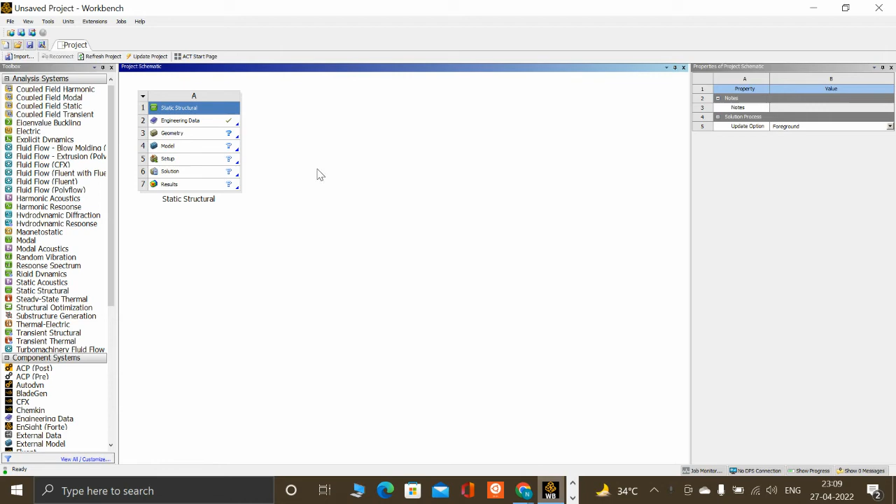So here we have to firstly input the engineering data of the materials that we are going to use. So we are basically going to use annealed copper and we are going to use die steel. So for annealed copper we choose isotropic elasticity and as well as bilinear isotropic hardening.

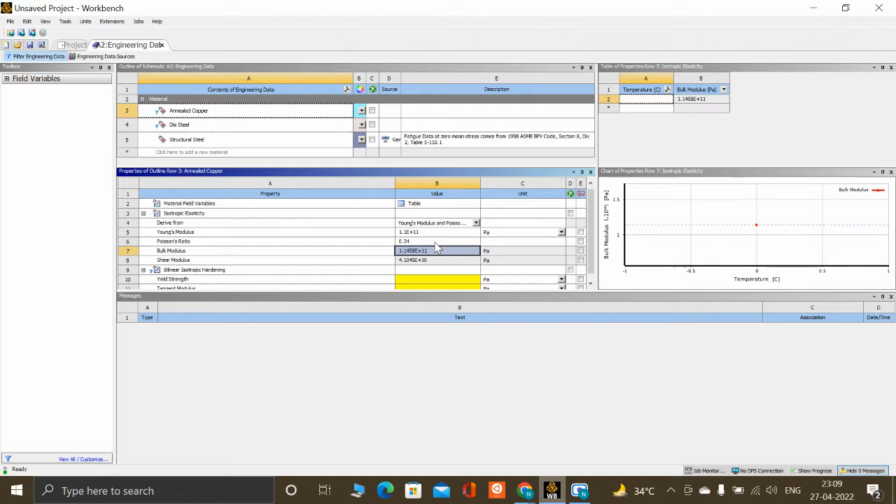So Young's modulus of copper, if we look at it from the slides, it is 110 GPa and Poisson's ratio is 0.34. So Young's modulus is 110 GPa and it is 0.34. The yield strength is given as 33 megapascal and tangent modulus is 167 megapascal.

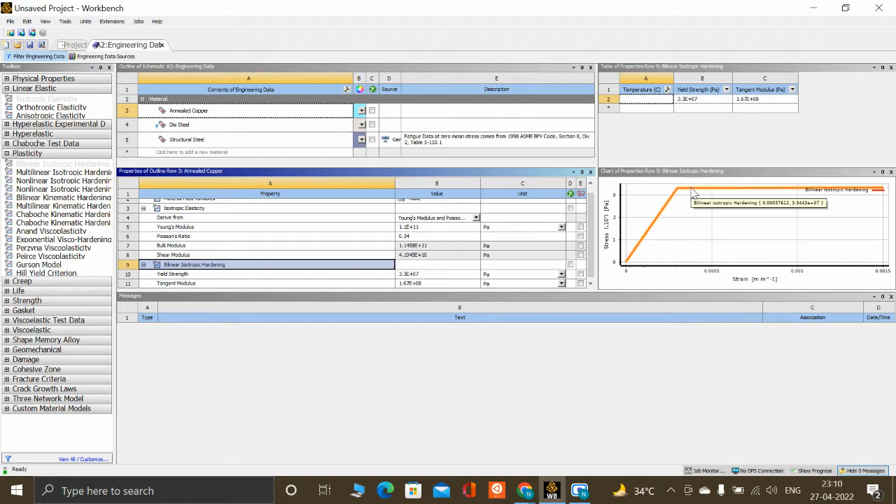So we can see this is the bilinear isotropic hardening. So this is the elastic part and this is the plastic part. As we can clearly see, the slope of the plastic part is lesser than the slope of the elastic part because Young's modulus is in gigapascal and the tangent modulus is in megapascal. So that is quite obvious.

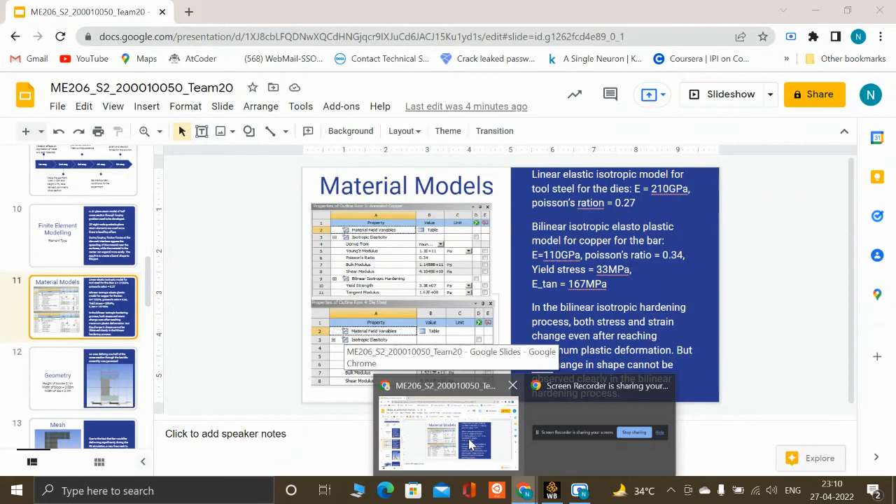We now define for die steel. So die steel will majorly deform only in its elastic region. So we choose only isotropic elasticity, and we again set the Young's modulus to be 210 GPa and Poisson's ratio to be 0.27. Okay, that's fine. So the materials have been defined. So let us save it.

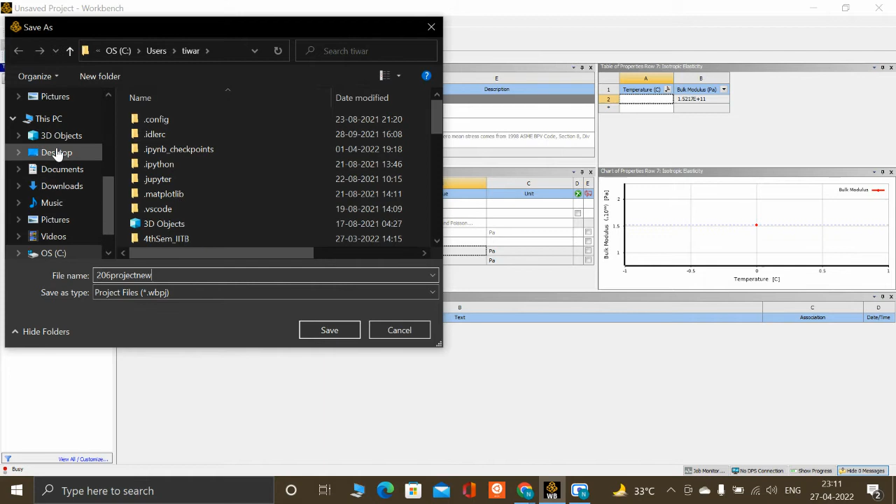Okay, the project has been saved. We now return to project. We now go to geometry to define the geometry of the material. Firstly, we choose the analysis type to be 2D. Then we right click and we go to new DesignModeler geometry. It's taking time.

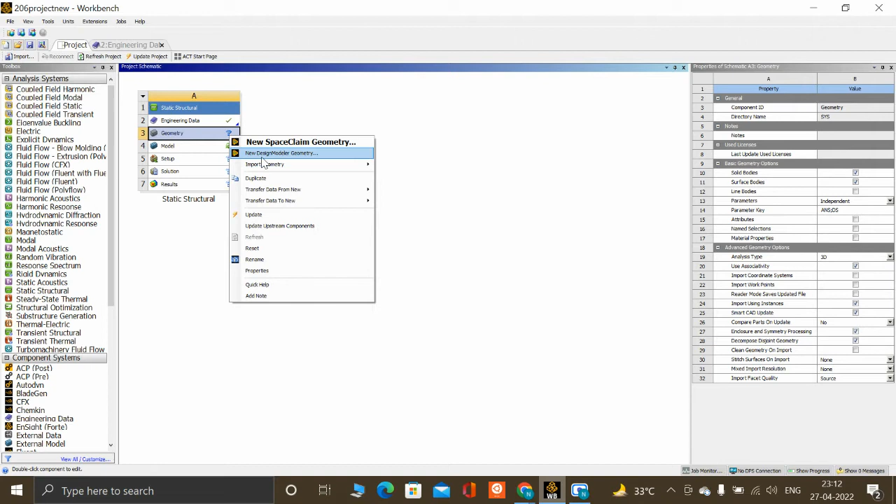We click on new DesignModeler geometry. It takes a little time. Okay, it has opened. So we choose XY plane and so we are now looking at XY plane right now. So we have to draw our geometry here.

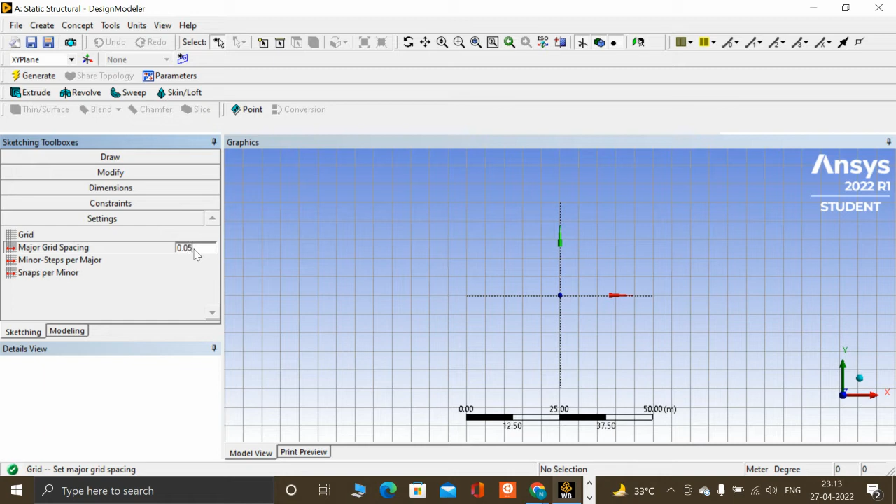So we go to sketching and firstly we go to settings to make some grids here. We make 2D grids and we set major grid spacing to be 0.05 meter because the mesh width is 0.1 meter, so it is reasonable to set it like this. So units, you can check it from here. The units are meter and degrees, so it's fine.

So we now go to draw. We choose rectangle because we are assuming it a 2D strain element. So we enlarge it a little so that these grids are visible. So this is the rectangle that we had drawn. So the width is 0.05 meter and the height is 0.1 meter. Each box has a height and width of 0.05 meter.

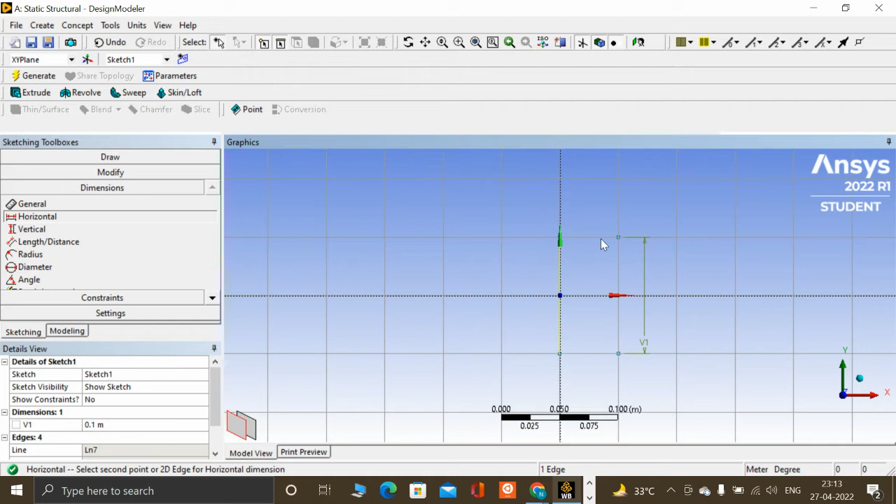We now make some dimensions on it. So let's give a vertical dimension to the given rectangle that has been made, and let's give horizontal dimension as well. Okay, so now we go to modeling. We expand XY plane and we see there is a sketch 1. We now want to create a surface from this sketch. Then we again select sketch 1 and we click on apply.

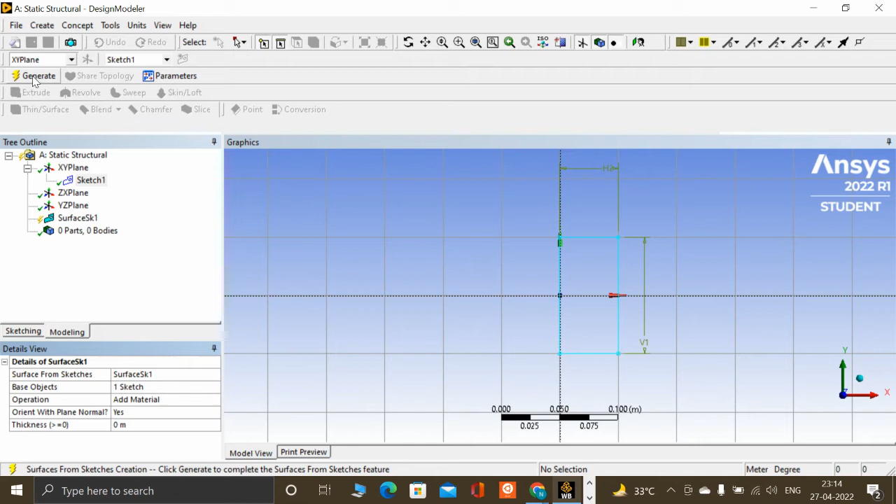So on clicking on generate, a surface is created here, as we can see. Now we also need to make the dies, both the upper die and lower die. So we click on create new sketch. In sketch 2 we again go to sketching. We choose rectangle. So in case of die, the width is 0.1 meter and we can choose height anything. So let's choose it something. The height really does not matter because we are applying force from above the die, and so the height of the die does not matter.

Now coming to the modeling part again. So we have to create the surface again from the sketch. Choose sketch 2, click on apply, but we have to take care that we now change this operation to add frozen, because if it is add material, then ANSYS will think of the two different blocks as the same body and combine them, but we want them to be different and we want frictional effects between them, so we have to change the operation to add frozen here. Then we click on generate to generate the surface.

It has been generated again, and now we need another sketch for the lower die. Similarly, we again go to sketching, we again choose rectangle, and so this is the lower die.

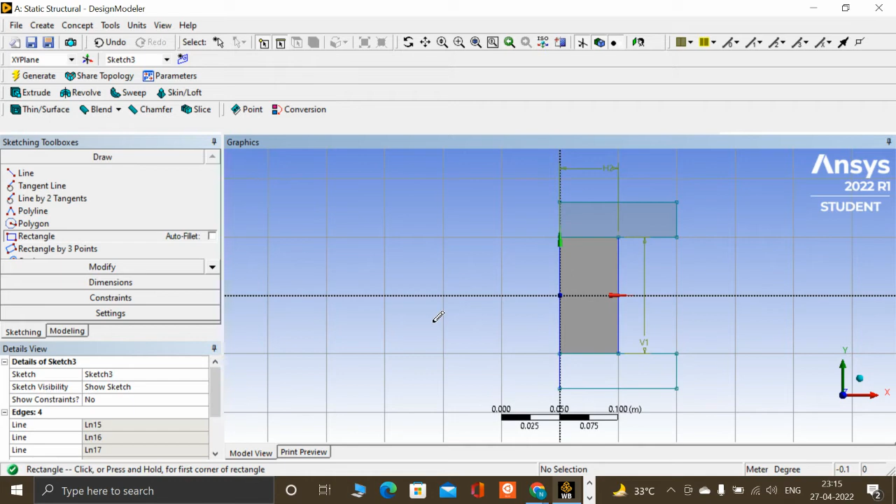Similarly, we again come to modeling, we choose sketch 3, and we again go to create surface from the sketch. So let's select sketch 3 and apply. Again we have to modify the operation to be add frozen, because we don't want it to be clubbed with this copper block. We don't want ANSYS to treat it whole as a single body; rather we want it to treat it as three different bodies which are in contact with each other, not joined.

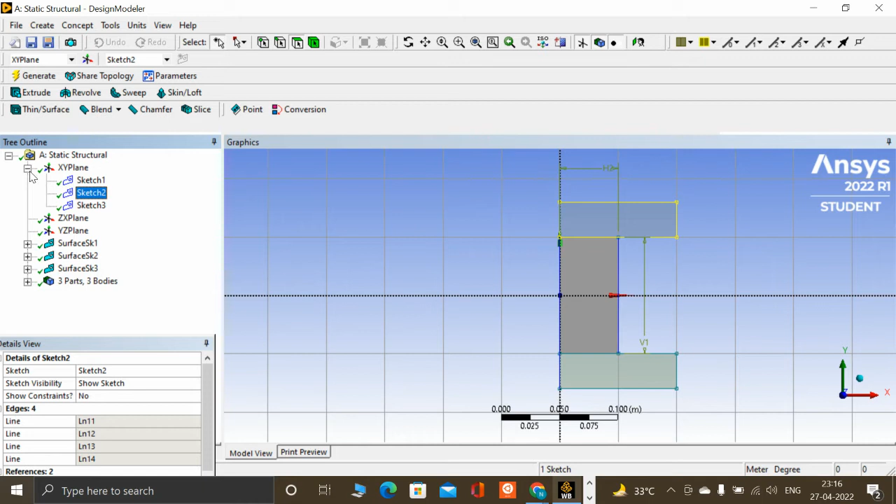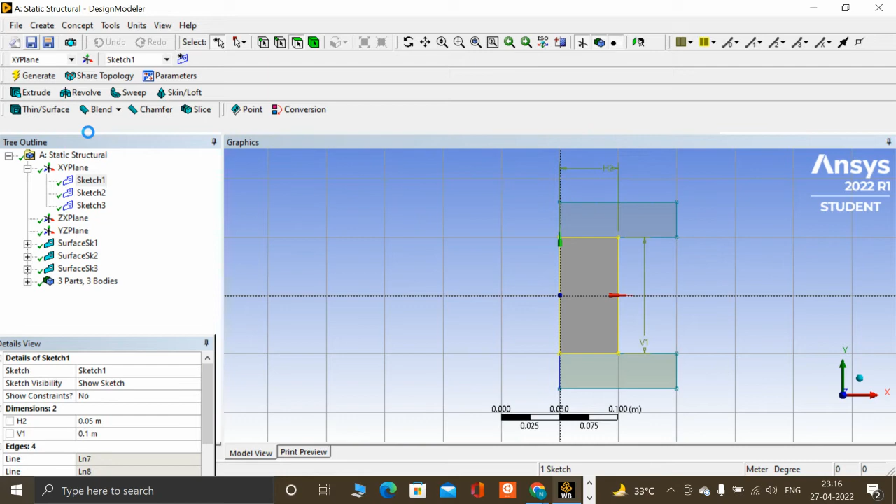So we click on generate to generate the surface. It has been generated. So this is our geometry that we will be using for the analysis. Right now let's also put a horizontal dimension here. So go to sketch 2. Okay, it's fine. So this is the preview of the geometry. Let's save this. It has been saved, we can exit it now.

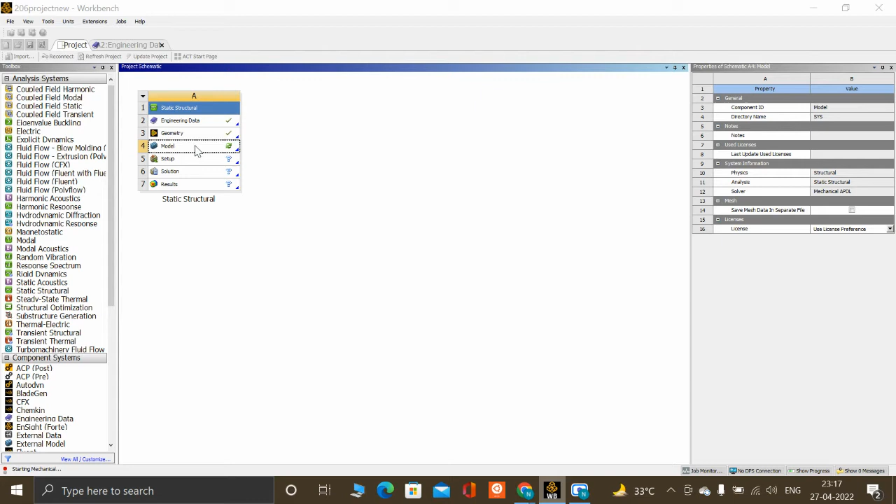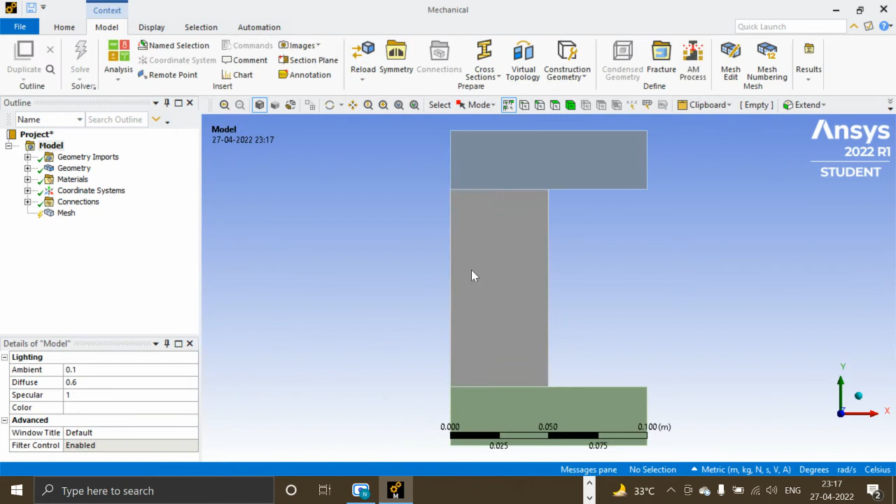Now here in geometry we have to change the analysis type as 2D, not as 3D. We want to do 2D analysis. Okay, it has been changed. Now we go for the modeling process. It takes a little time to open again. Okay, so the geometry has come here. Now let's see the geometry. So we have three different surface bodies.

So this surface body, let's rename this. Let's call it copper block. Let's rename this as well, and let's call it upper die. Let's rename this and let's call it lower die. So for the copper block, we see here in the details that the material is structural steel, which we don't need. It should be annealed copper. We change it accordingly here.

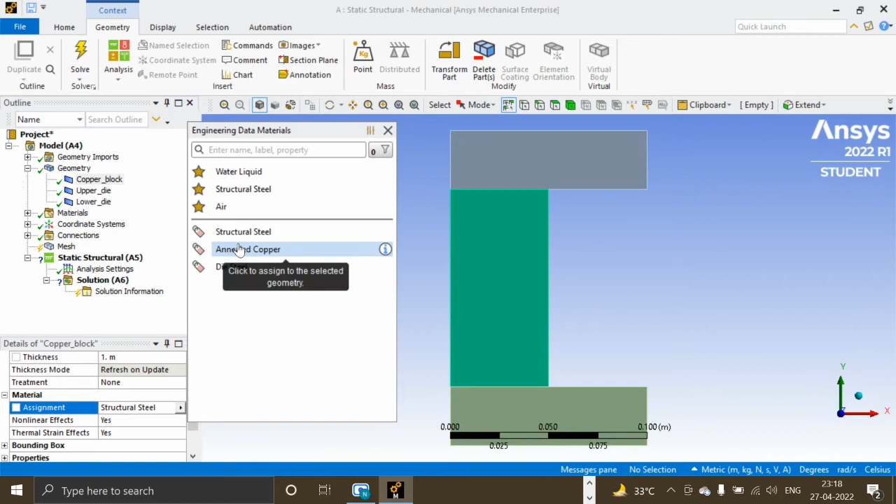Similarly, for the upper die, we want the material to be die steel. So again, we have to change the material. And similarly, for the lower die, we again change the material to be die steel. Okay, it has been done. So let's save it. Again, it takes a little time.

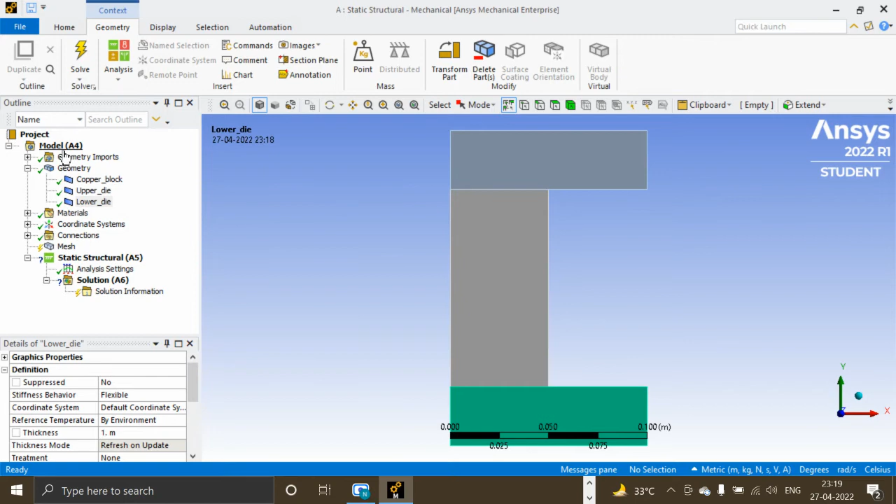Okay, so as we all know, we have taken only one of the parts. So this is the symmetry line, and the copper block is like this, and the dies were also completely rectangular. So we had cut it symmetrically in the vertical direction. So we have to make this particular edge a symmetry line. For this, we insert symmetry, we insert a symmetry region, and in geometry we select it through an edge. We click on apply. As we can see, the symmetry normal is the x-axis, so it is fine. The symmetry is along the y-axis.

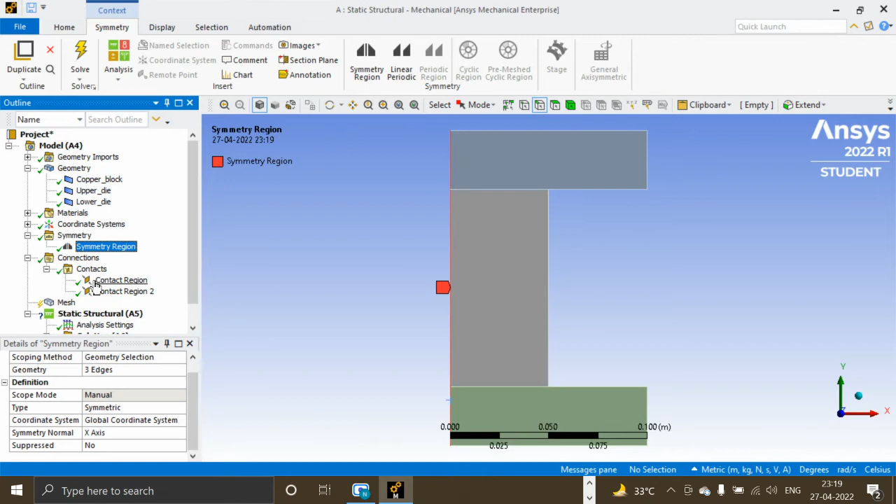Now we come to connections. So there are two contacts. There is a first contact between the die and the copper block, and in definition, the type has been defined as a bonded contact, but that is not true. It will be frictional contact, because in forging, friction plays a very important role, and the friction coefficient would be 0.05.

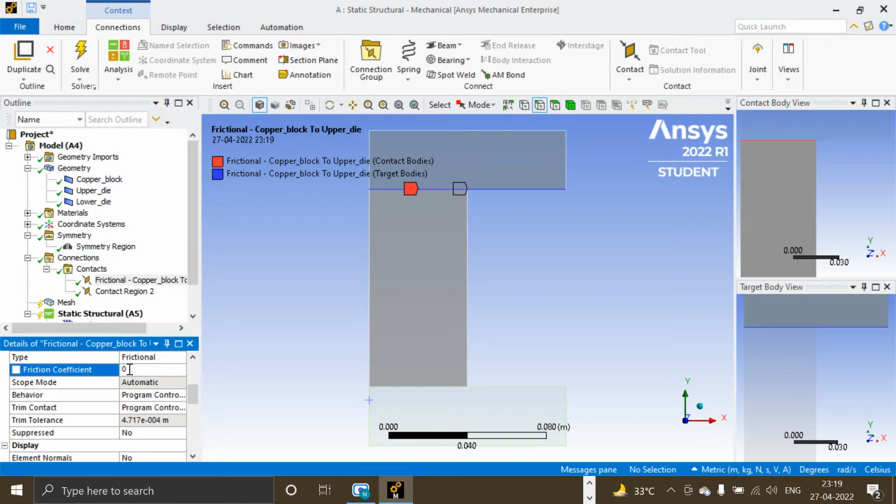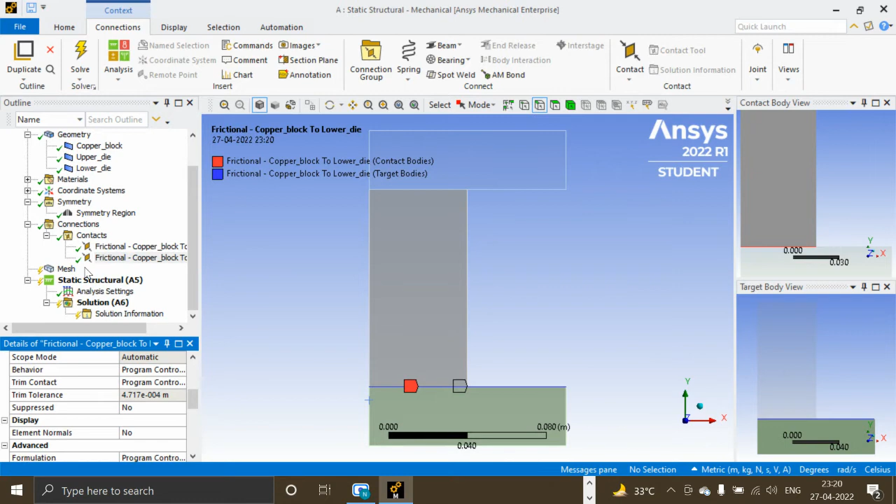Similarly, for contact region 2, it will be frictional contact, and the friction coefficient would be 0.05. Okay, it has also been done. We now come to static structural. The environment temperature is 22 degrees Celsius, meaning this experiment is performed at room temperature. So we assume there are no considerable thermal effects in forging.

In analysis settings, we have to turn large deflection on, because here we are going to do 25% deformation. So that is actually large deflection, so we have to turn it on. Now let's try to do the meshing. For that, we click on solve.

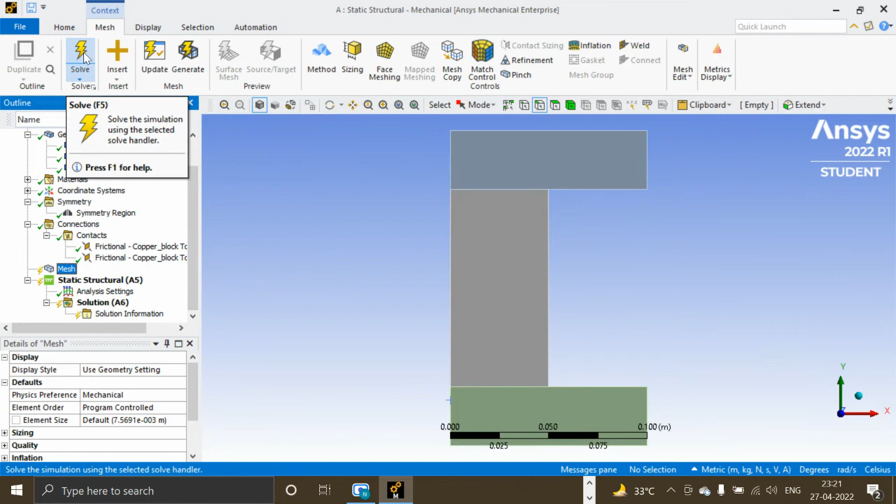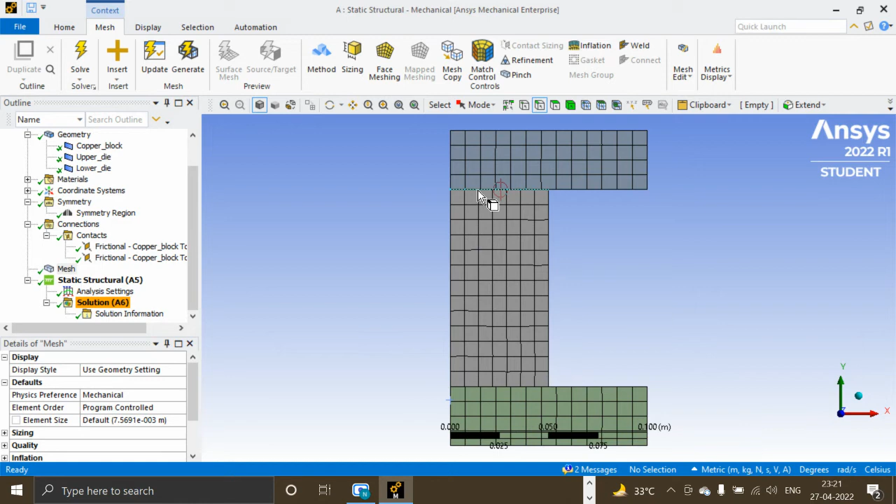So this is the meshing that is automatically generated. But what actually happens while doing finite element analysis is that at each node, an artificial spring is assumed, and the problem is solved accordingly. So it is better practice, if two elements are in contact with each other, that the mesh lines coincide, meaning they should be in a single line with each other. But here it is not the case. So we can try solving it as well.

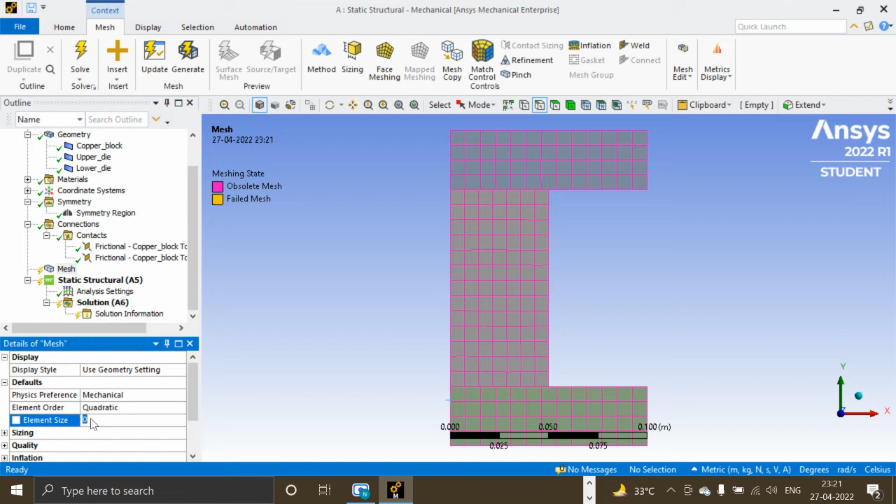Also, the elements are linear. We want them to be quadratic. So in mesh, we choose the element order to be quadratic rather than linear or program controlled, and we set the element size to be, let's say, 0.0025 meter, and we again do the meshing.

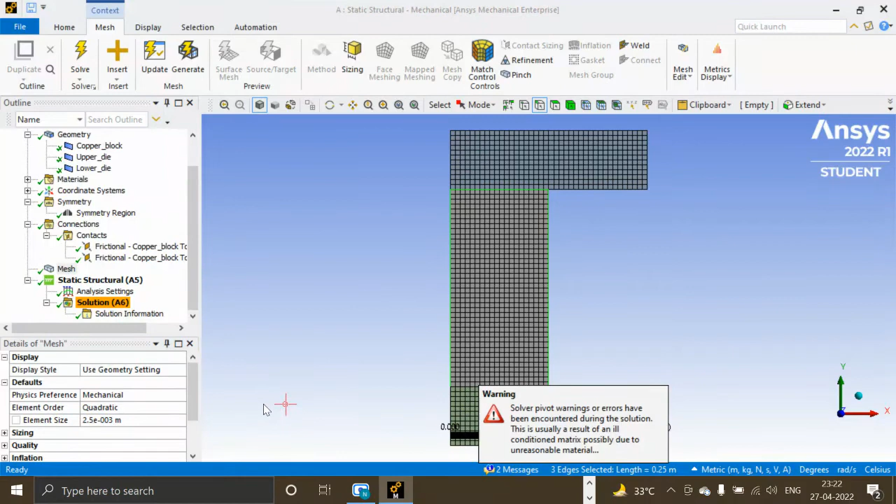So yeah, this is a good meshing that we obtain. So the lines are actually in a single line in all the three bodies, and the element order is quadratic as well. So it is still solving. Okay, it is ready.

Now let's insert a remote displacement for the bottom part, and we apply it. So the bottom part will not move, as we all know. So the x component will be ramped and it will be 0. The y component again will be 0. There will be no displacement in the y component as well. So all the 3 degrees of freedom will be 0, 0, 0. So it's also constant.

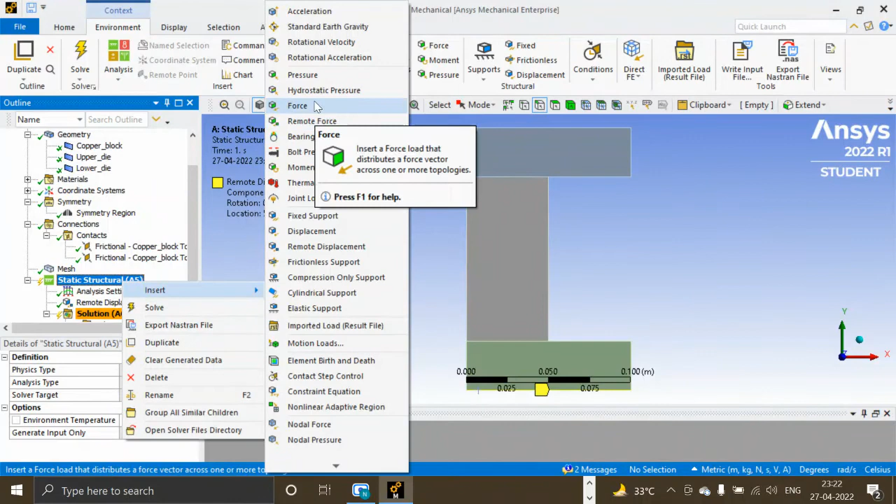Now let's apply a pressure at the top of the die. So we are actually trying to verify the problem. If a pressure of 86 megapascal is applied, we were getting a deformation of 25% according to theory. So we will try to apply a pressure of 86 megapascal, and we will try to see what deformation we get here. So where do we need to apply the pressure? That is the geometry that we have to select. So we will be applying the pressure on the top die. So we select it and we click on apply.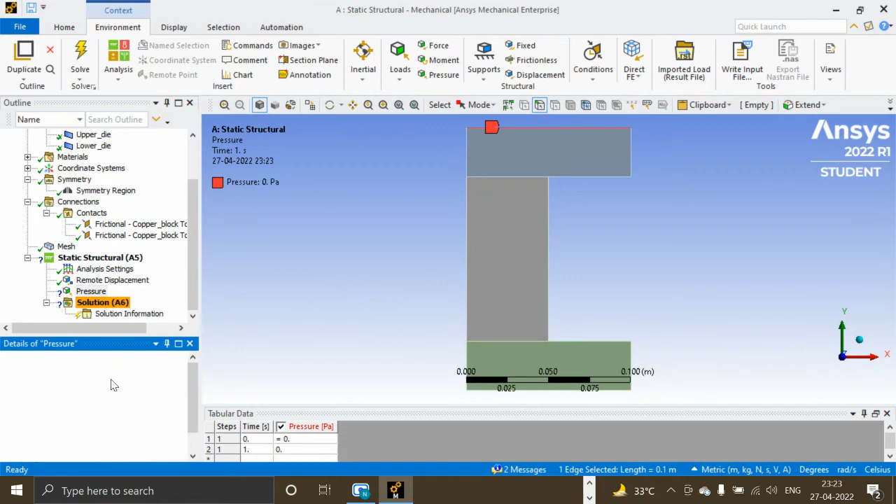And how will we define it? So we will define the pressure by components, and the x component would be 0, and the y component would be 86.62. So it is in the negative y axis. So it is minus 86. So let's see what was the pressure that is needed. So the pressure was coming out to be 86.62 megapascal. So we will apply 86 megapascal approximately. Apply minus 86 megapascal.

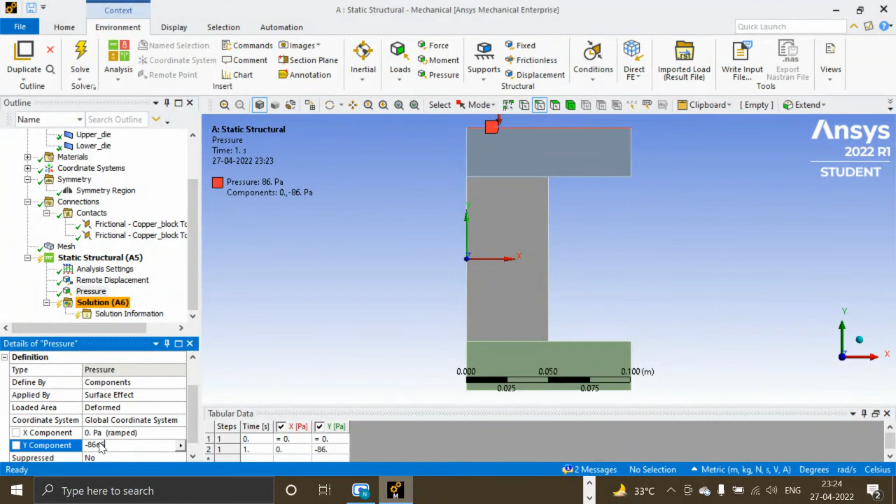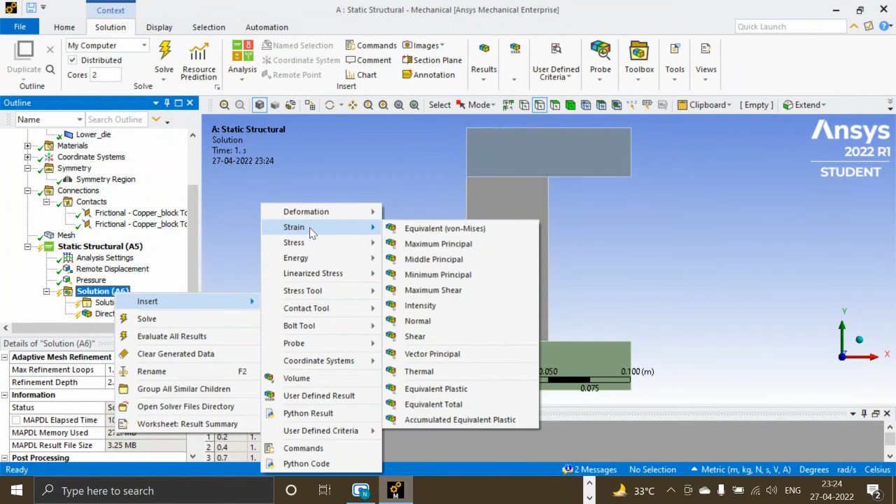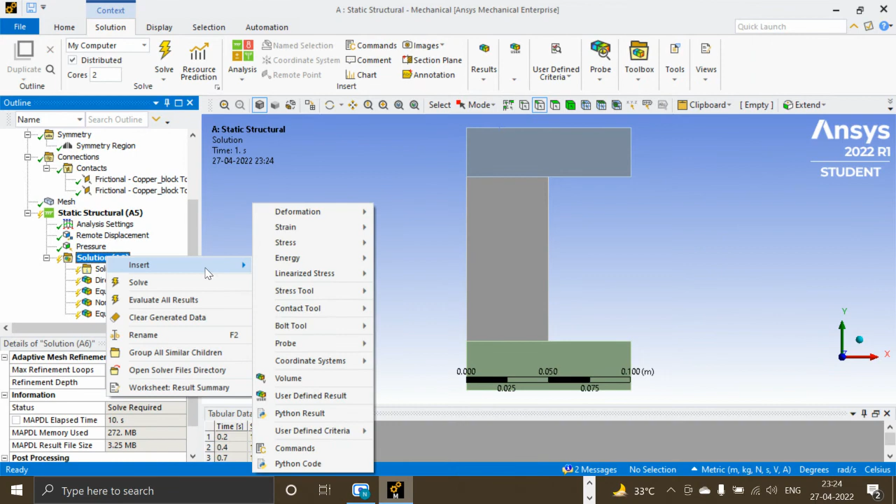That has been done. Now in solution we need to insert, we are mainly interested in directional deformation in the y-axis. So we choose y-axis here. We are also interested in von Mises strain, that is equivalent strain. We are also interested in normal strain in the y-axis direction. We are also interested in stress. So firstly equivalent von Mises stress. We are also interested in normal stress in the y direction. So these are the things in which we are interested, and we will be solving it for them.

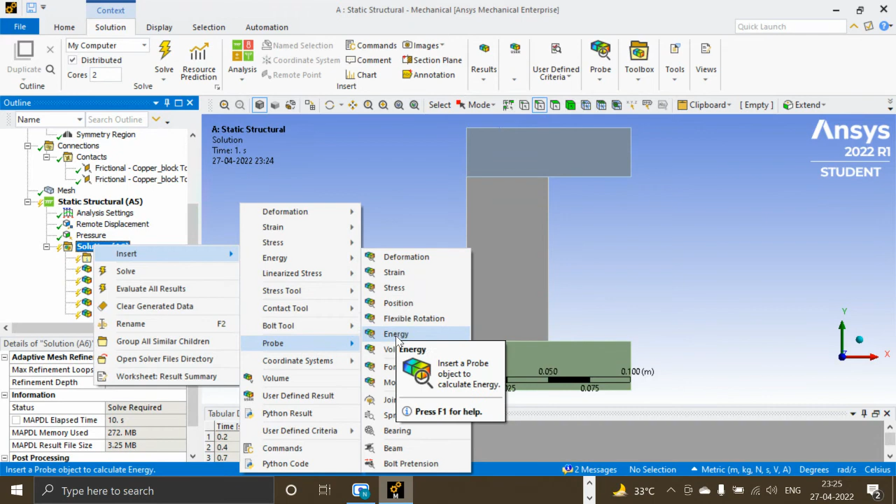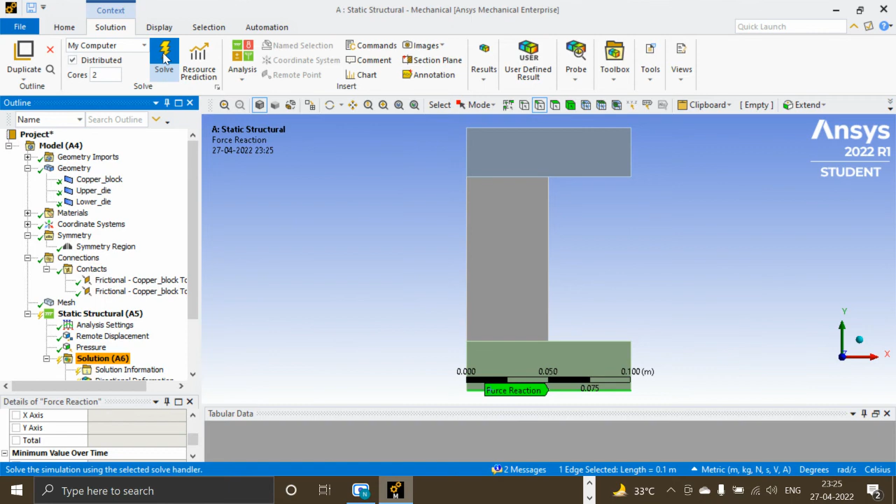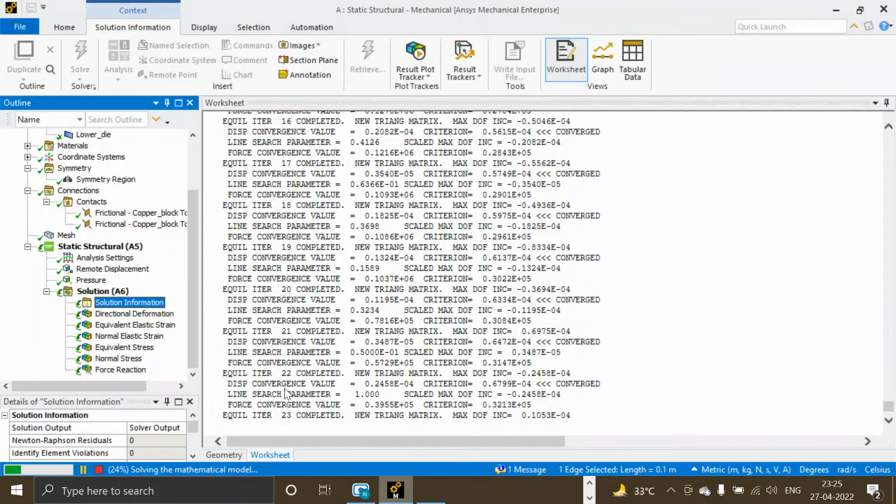Okay, let's try to get a reaction force at the bottom point as well. So force reaction. So boundary condition is this, and is remote displacement. So now let's try to solve the problem and see what we get. So we click on solve. Now here we can get the solution information very well here. So here is the log that ANSYS prints. If we want to see the force convergence graph, we can also see it from here.

So as we note here, whenever the sub-step converges, the force criterion also converges. That is one thing that can be noted here. And there are some bisections also that happen here, like this one. This is a bisection. So when it finds difficult to solve any problem due to increment in load or anything else, it just bisects it in half and then tries to solve the problem in two iterations. So this is how it does. So it is still solving, and 24% has been solved.

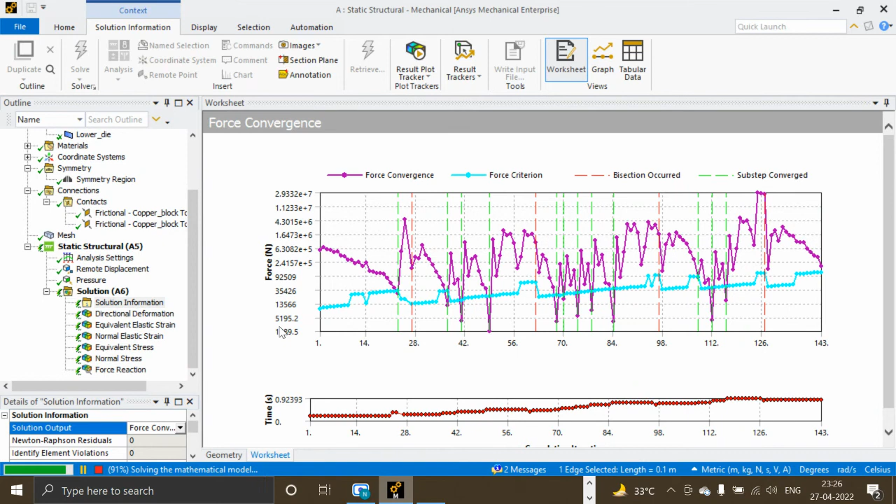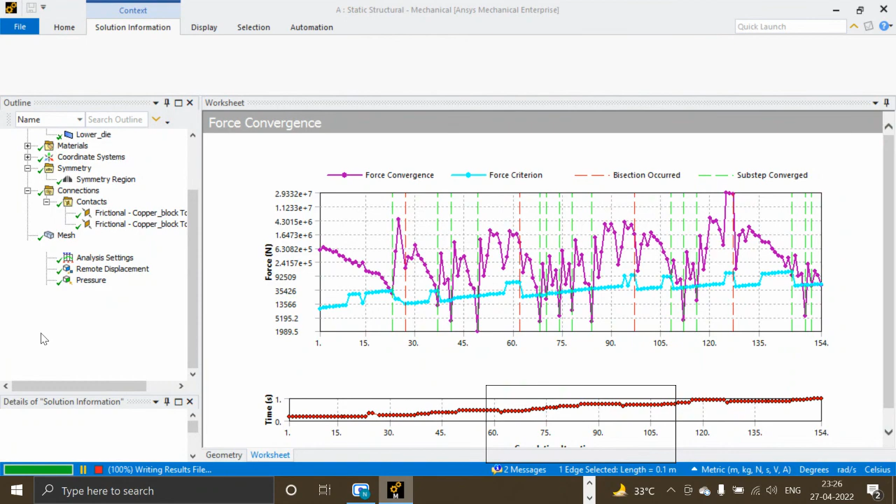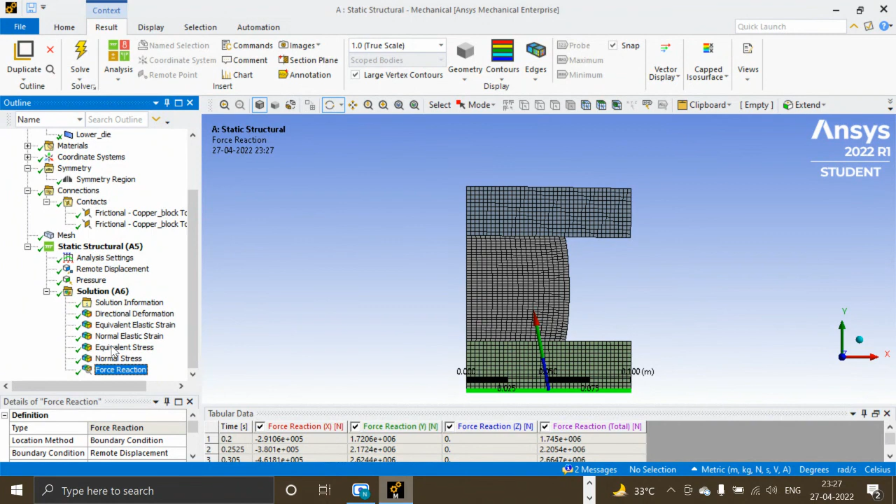So again, if you look at some of the analysis, the strain is more in the die where it is pressing it. So maximum strain occurs here. And if you look at the equivalent elastic strain, it is least in the bottommost die at the right part, because we expect it to be here. And again, at the top die at the rightmost part, the elastic strain is quite low, and we expected the same. So thank you. That's it.